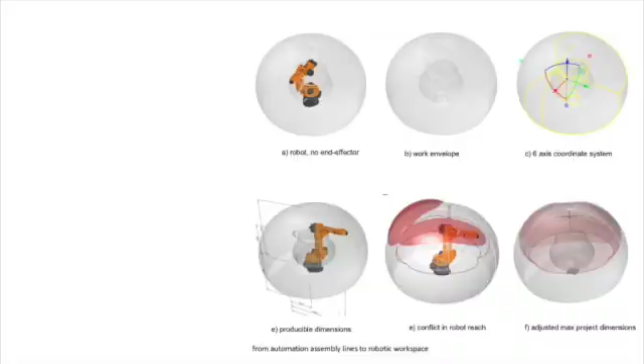So what we're looking at here is a change that happens from automated fabrication processes that have been in the industry for approximately 20 years, robots building our cars together, towards a proper understanding of what the robot actually does.

So a robot as such is just a machinery that's super blind, it's dumb, and it needs to learn all the different processes. So it stays within a particular work envelope, as we do see here. It's almost like a Captain Hook.

So this one here is one without the end effector. So any tool that you put onto the robot will help you to go into fabrication that's 6-axis. So it's a very universal tool that allows us to undertake different work processes depending on the machine that you're actually putting on these industrial arms.

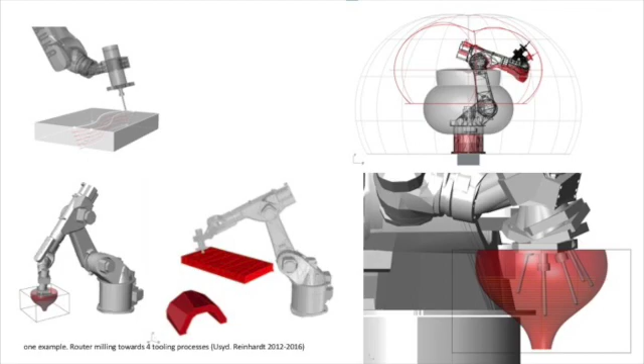So with a simple tool that's, for example, a drill, everybody knows how we're working with that, yeah? You can cut into styrofoam, you can cut into plaster, you can make solids, you can make these voids, you can cut so that you can actually put up a catenary structure, you can work inside a work envelope, and you can construct that same work envelope as well.

ETH has been using these processes on a linear track, which expands the workspace of the robot in order to produce actually quite interesting designs.

Here, a bricklaying structure. We have been continuing to work with that in the space of fuzzy modules, where we're actually looking at timber constructions that are highly contextualized depending on the availability of the wooden materials in the assembly process, and highly responsive towards the environment in which the robot is actually working.

So that's a sort of very brief overview. Something that changes in the building industry from automated processes and completely defined robotic protocols towards explorative design processes and effects. So this one here is a mid-air deposition of a structural component that may help you to produce doubly curvilinear forms in space.

So this is sort of structural reinforcement in concrete walls. That's completely dependent on interactive collaboration in terms of a sort of moving platform underneath and the form that's being determined in the process itself.

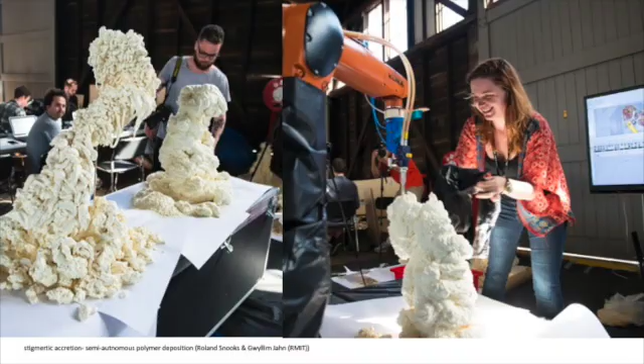There's also a possibility to work with multi-agent systems, again, like a structural approach that helps you to register with the Kinect sensors, the deposition, and thus produce these large cantilevers. So you basically have a data protocol that builds up by information of sensing towards the actual execution of the process itself.

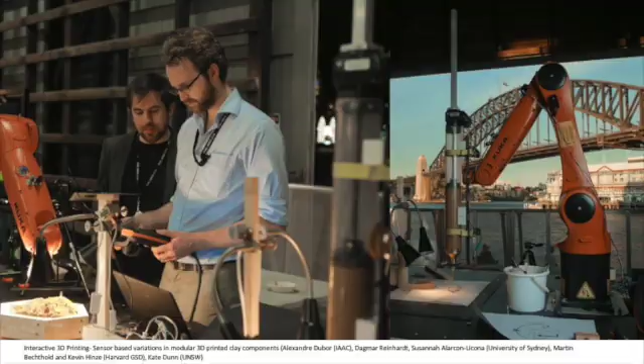What we also had was more material tests in terms of developing new technologies here, in the sense of custom sewing of timber veneer structures, which can actually be moved into a shingle system for interior spatial divider walls, or going into a feedback data system between program language, robot execution, and the data structure, where sensors test the heights and densities in terms of clay printing and punching of these robotic structures, enabling us to do a very different understanding of how we're dealing with a very traditional material such as clay.

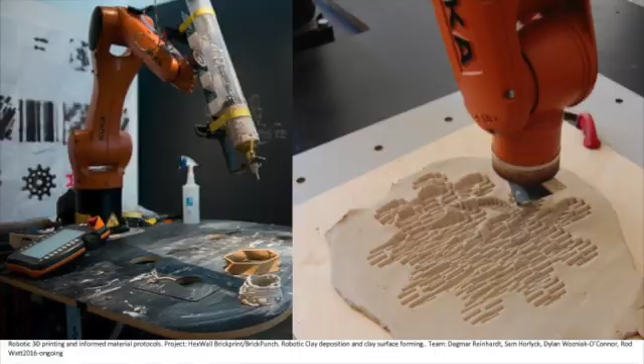So we have the possibility here where the designer is directly working with the data in order to impact these different patterns. Why these patterns are important, I'll show you in a second.

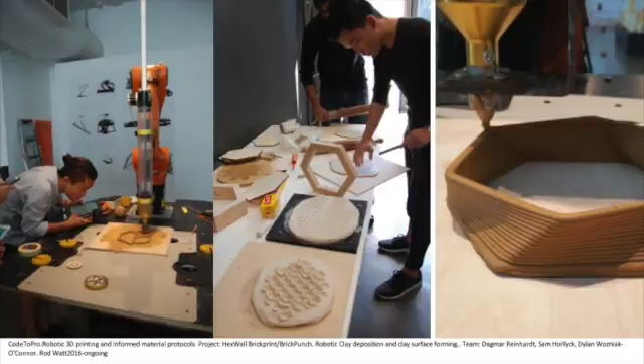So we continued these structures in a very small workshop, and one of the things that came out of that is that we can actually produce modules that rethink brick structures, the oldest building material, in terms of structural performance. We could look at 1,000 different bricks, robotically deposited and incrementally strengthened in their inner core, depending on the structure of the walls where they're sitting, so they can all be unique and participate in this larger whole in terms of structural performance.

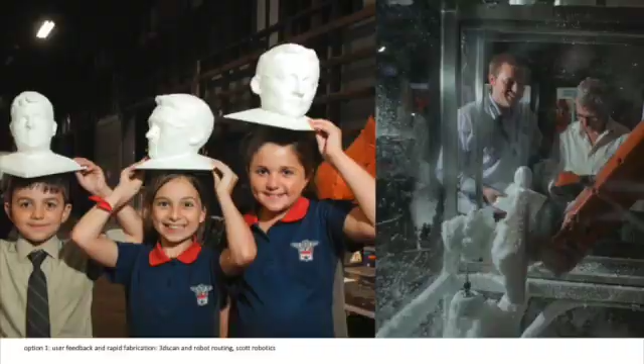And then, as part of the RobArch 2016, we also had audience participation, so you could get your head scanned and robotically cut within a space of 5 minutes, which was fantastic.

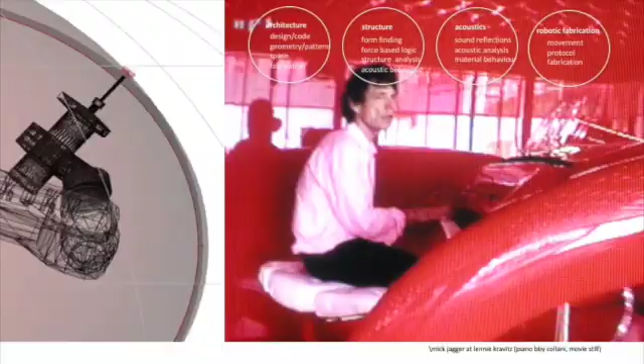Now we continue into the second section, why we find this so extremely interesting. One is that we have all these new material explorations. The other thing, and this is why I wanted to present this here, is that we can actually build a very different sustainable future by looking at how we deal with sound and acoustic performance.

We're at the moment all moving in spaces which are acoustically amplified. I could basically talk to you all without this microphone, we just have it for the film. But it's interesting because if we take acoustics as a sort of well-being into the equation, something that doesn't have this large energy consumption, then we have the possibility to provide a better way of how we speak to each other, how we create communities, and how we deal with our energy trajectory.

So what I'm really interested in is the capacity of robots to move from the pure design and scripting space that we've developed in architecture, with very proficient design systems, towards the digital and advanced manufacturing that we have. There's a proper link between the architecture, the structural behavior, the acoustic behavior, and the advanced manufacturing and robotic fabrication behavior.

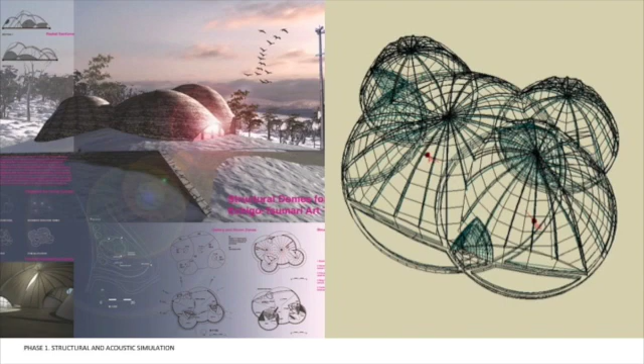In order to illustrate that, what we have here is something that would be perfect from a structural point of view. So 6 tons of snow on a building would lead you to a form that is a sphere. But what you see on the right-hand side, if we have a sphere, we can't really make that into a community center because it has all this sort of white noise in which people can't communicate with each other.

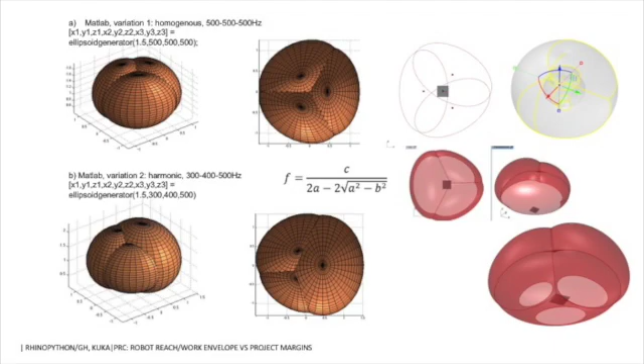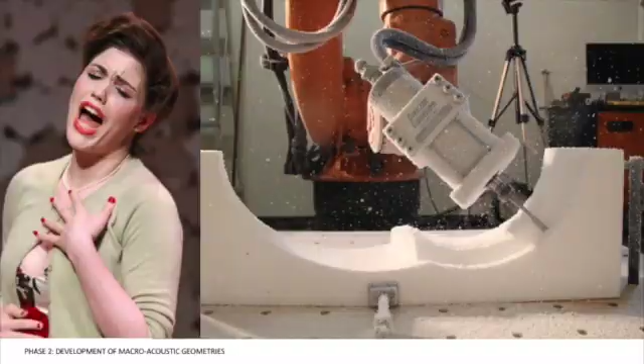We took that as a possibility to look into robotic fabrication and prototype testing of a 1-to-4 component that literally could become that space, with an intersection that starts with a MATLAB equation and looks at 3 different ellipsoids. If you speak into these ellipsoids, the sound is actually thrown back. If you change these ellipsoids to all be different from each other, you have 3 different sounds reflected back to you. So if you have 3 people speaking into these 3 different ellipsoids, sorry, it's a bit of a conceptual game, I know, but that's just a possibility. You would have a trichord, almost a space that works like an instrument in which a community could actually take space.

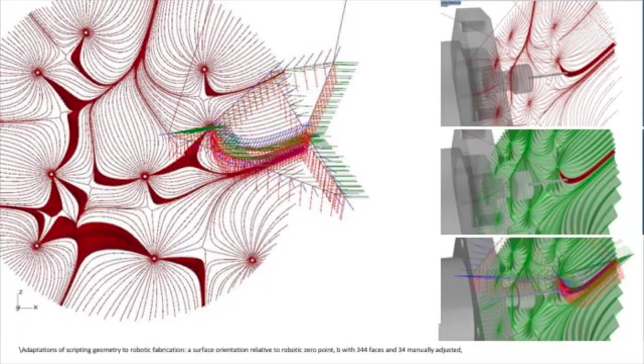It's not that interesting unless we bring these things into the real world. So we tested these patterns here, which are basically a pure hexagonal pattern, deformed by different attractor points, juxtaposed with a flower pattern, which proved to be much more interesting. We sent that with our acousticians through a reverberation room, and what you see here is that the sound is actually reflected much better by the flower pattern. We translated that into an acoustic profile of approximately 350 facets that are able to throw the sound back into different directions.

This is basically robotic carving that can then be scaled up as well. So if that was implemented in a larger space, it would basically act as a sort of acoustic chandelier that gives you the possibility to completely direct the sound of the space in which you are living.

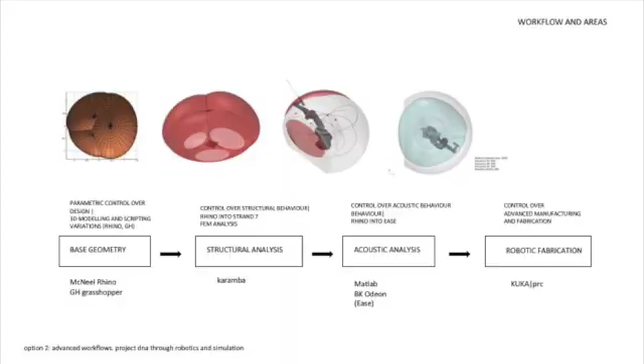Which is interesting because at that point, we're not really talking about retrofitting an architecture with acoustics as a sort of afterthought, but we do have the possibility to work directly with structural engineers and architects in order to make these acoustic performances. There's a very nice workflow now available through robotics as multiple, multi-tool and multi-axis machines that take us straight from design programming in a computational environment towards heavily working with different interdisciplinary collaborations and specialists in their respective fields, and then straight into advanced manufacturing.

That basically means we're working straight with the code of the DNA. We're not working much more with types or forms, but with formal tendencies, things that can be changed by the designer within the process. So instead of making a simple drawing with a robot, you can produce 1,000 drawings within that same DNA pattern code that's being executed by the robot itself.

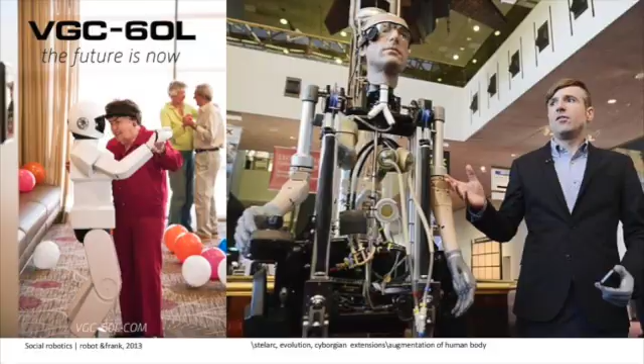With what are the future trends for the building industry? Because this acoustic performance is just a very small section of the area other people are also working in at this particular stage. So what we're looking at here is social robotics. We're looking at robots not being used for advanced manufacturing, but actually used as a direct partner for dancing.

And I'm not entirely sure this is where we want to go with the robots, right? Because we want to dance with each other. We don't really need anyone else for that.

But what we might need these robots for is to help us execute things with people who are not completely trained in using manufacturing processes. So we have the capacity now, with sensor control and voice control, to equip robots with prompts, voice-speaking prompts that allow us to work directly and immediately with them.

This one here was also a presentation at Robots in Architecture: pick the yellow block and put it on the blue block, for example. Or we have the possibility to use robots linked to app tools so you'd be able to work in remote locations. Make a drawing on your app and then the robot 500 kilometers from here would be able to translate that into a drawing.

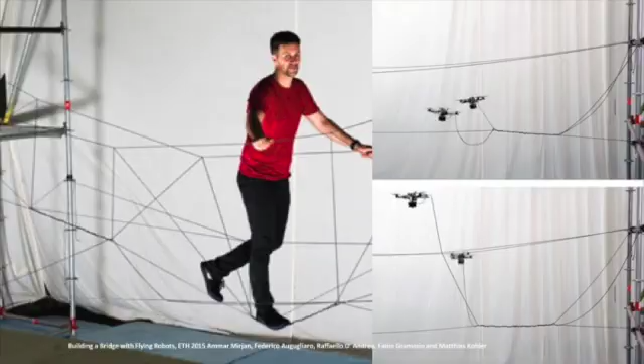We would be able, if we expand the robot towards working with drones, to make big structural walkways, for example, like this flying bridge built as a steel cable structure by ETH, in order to work in environments where we wouldn't be able to put down a foundation itself.

There's new advances with robots where we have the Yumi. That's one of the first, as is the EVA, one of the first dual robots. So we can do work processes much closer to using our two arms. Very heavily complicated structures, also not so simple to program, but they've developed some really good interfaces for that.

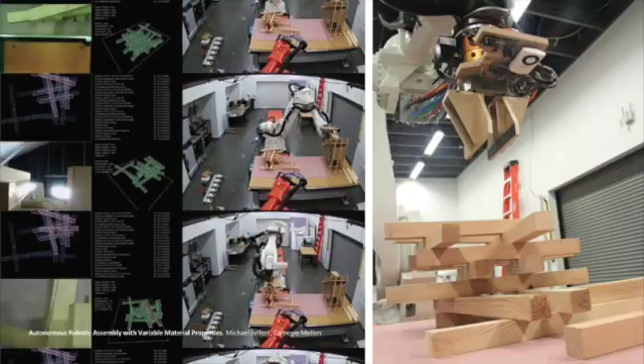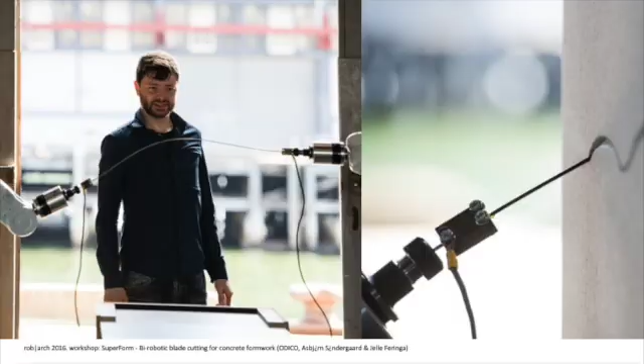We can look at building processes that are completed just by judging the material that's available, scanning that material, running an internal analysis, and then using an assembly for that. We can look at very complicated forms produced by sheet materials, and produce nodal joints and intersections for larger stadia or large span trusses by working with dual robots.

We can look at very cheap possibilities of producing very complex formworks, for example, for concrete panels, or to work directly with age-old materials like sandstone.

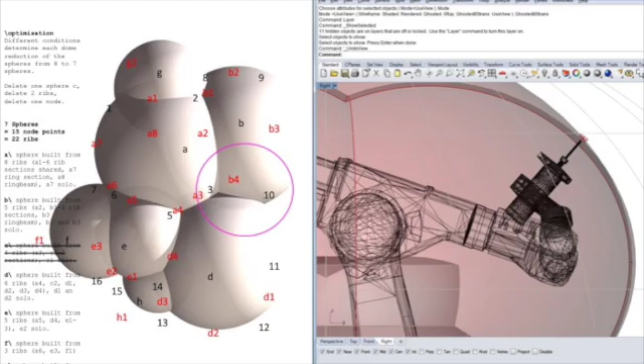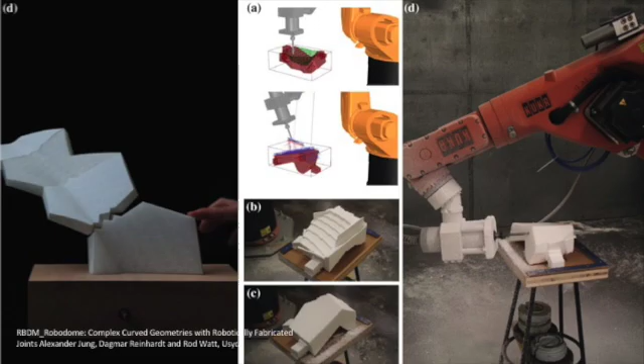And we do have the possibilities to go from the design generation towards, as I said, the structural analysis, towards going into these slightly smaller modules that interconnect and intersect with each other in order to produce geometries that would not have been available to us in the past 10 years as a direct process from design towards manufacturing.

And that would also allow us to go decentralized, from huge manufacturing towards 2 people and a robot that can execute very many different work processes, and in doing so bring forward the Australian building industry.